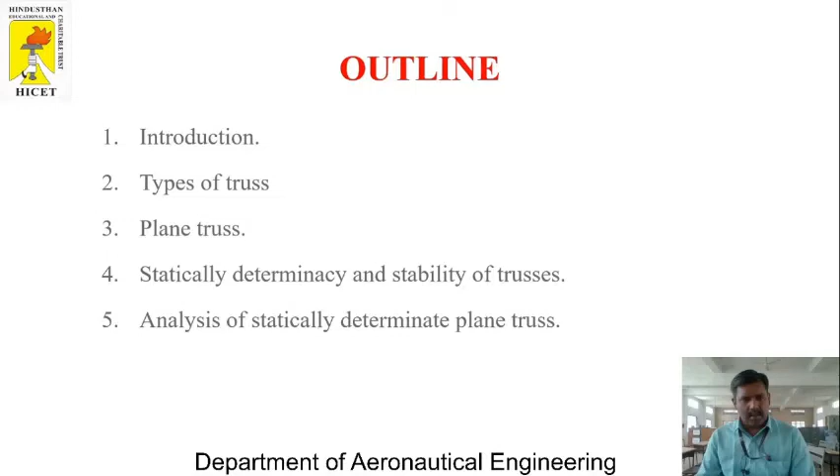In this video, we are going to discuss statically determinate structures. Outline of this video: Introduction, types of truss, plane truss, statically determinacy and stability of trusses, analysis of statically determinate plane truss, and sign convention used.

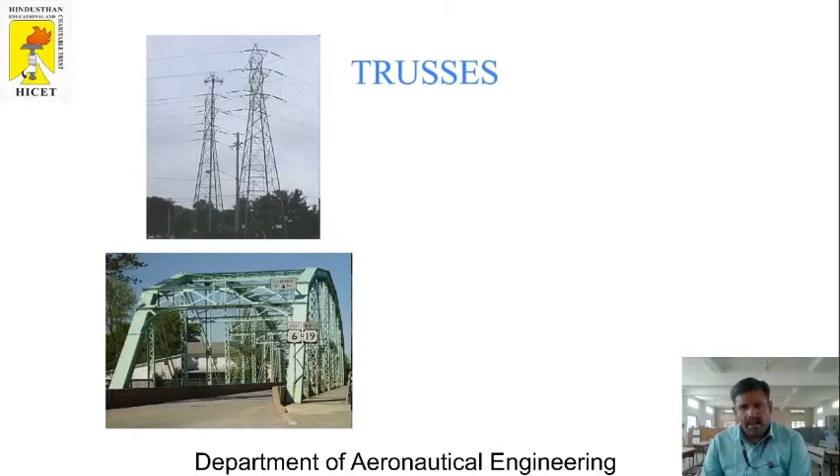Trusses. A truss is a combination of members joined together to form a structure. Here we have some practical examples of different types of trusses: electrical towers and bridges, mobile towers and a stadium, and here we have some other examples of trusses.

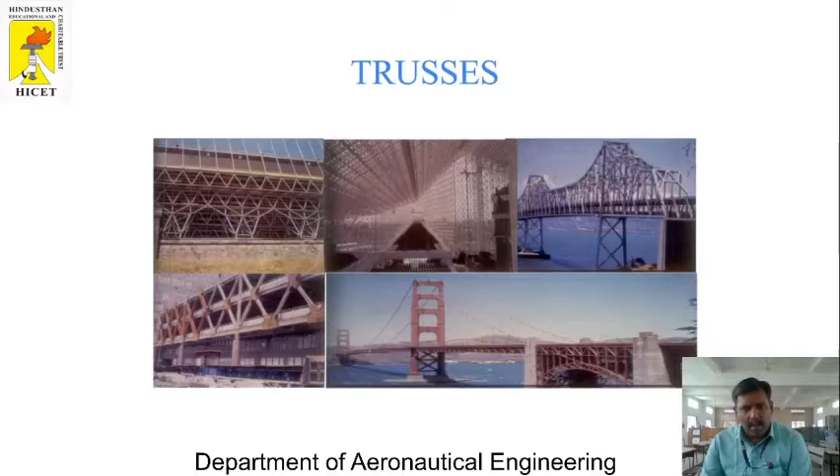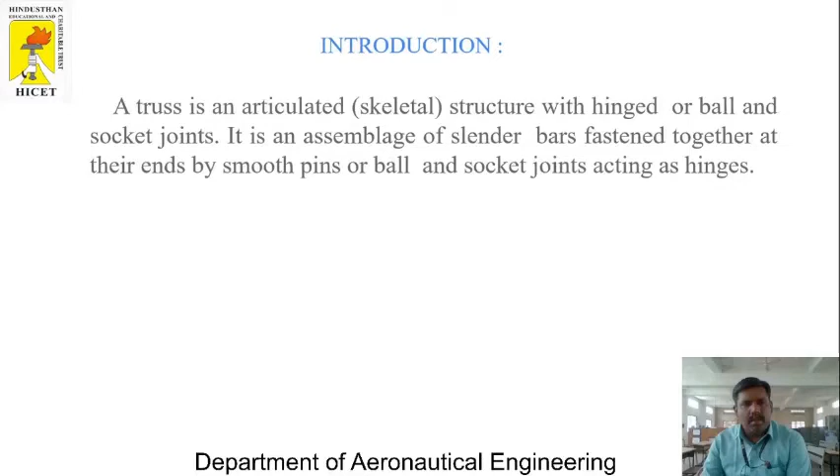Introduction. A truss is an articulated structure with hinged or ball and socket joints. It is an assemblage of slender members fastened together at their ends by smooth pins or ball and socket joints acting as hinges. In a truss, the joints are of pin type where ends of the members can rotate freely.

Individual truss members should not be directly loaded transversely. Loads should be applied at the joints of members so that no bending or shear force will be generated on truss members. Self weight of the members should be lumped at both ends for the same reason.

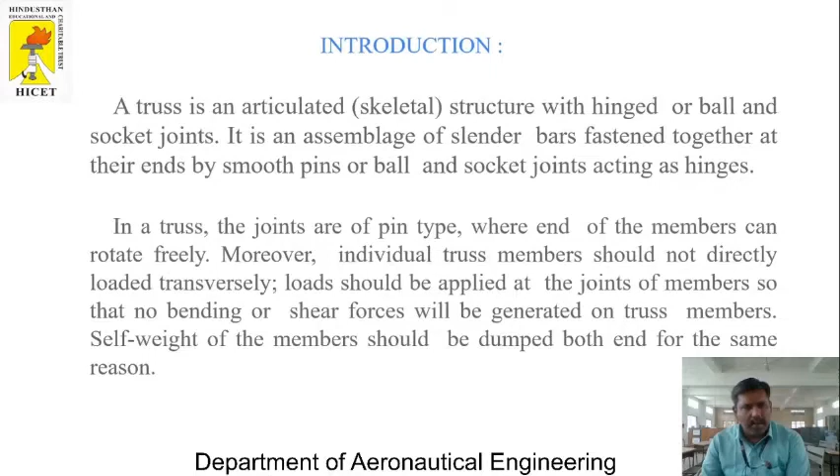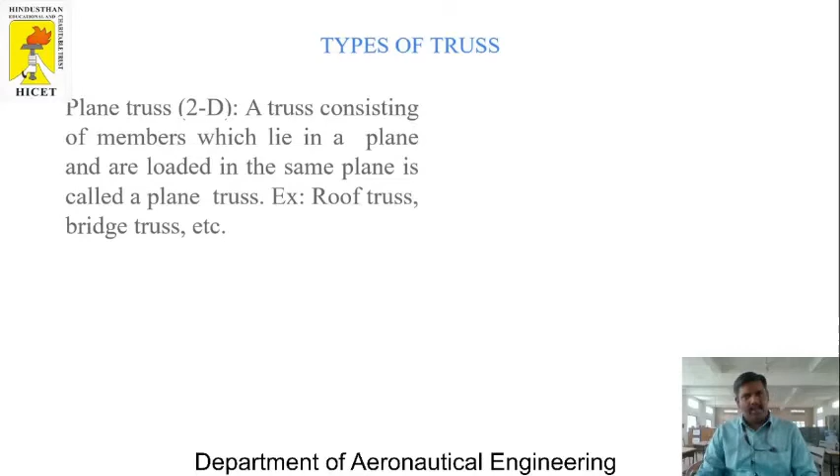Types of truss. There are two types of truss. The first is plane truss, or 2D truss. A truss consisting of members which lie in a plane and are loaded in the same plane is called a plane truss. Example: roof truss, bridge truss, etc. Here we show an example of a plane truss.

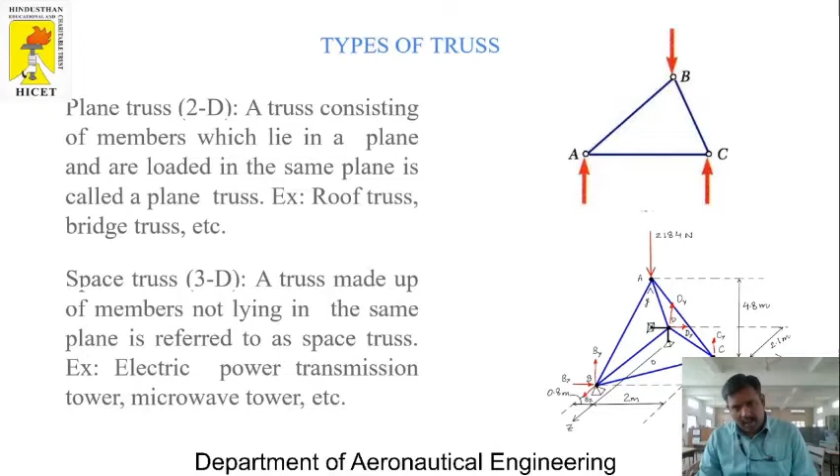The second is space truss, or 3D truss. A truss made up of members not lying in the same plane is referred to as a space truss. Example: electric power transmission tower, microwave tower, etc. Here we show the example of a 3D truss, which may be three-dimensional in the x, y, z direction.

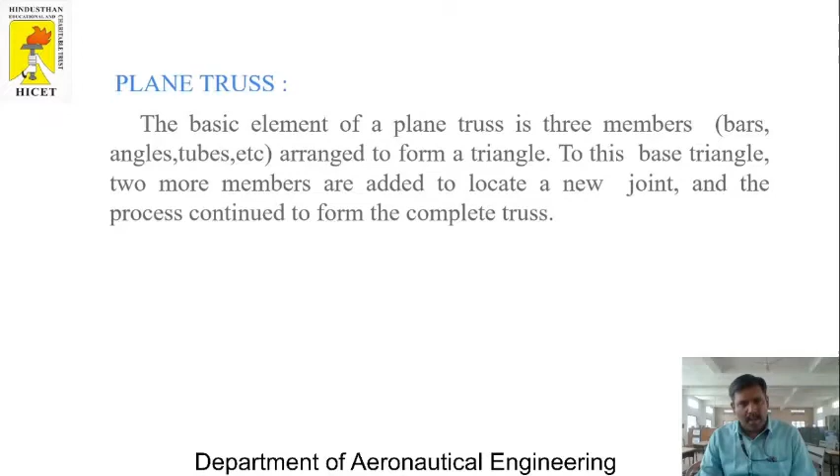Now we'll see the plane truss. The basic element of a plane truss is three members: bars, angles, tubes, etc. arranged to form a triangle. To this base triangle, two more members are added to locate a new joint, and the process continues to form the complete truss. Here we show the triangular truss, which is the basic form of the plane truss.

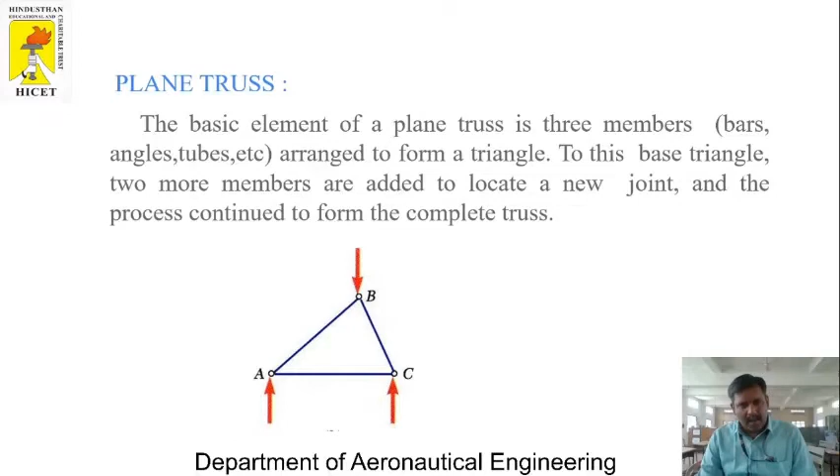The types of plane truss. These are the various types of plane truss used as roof trusses.

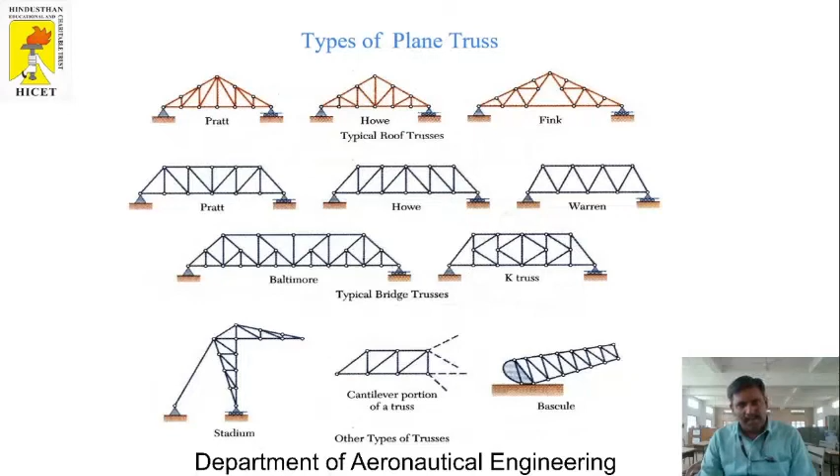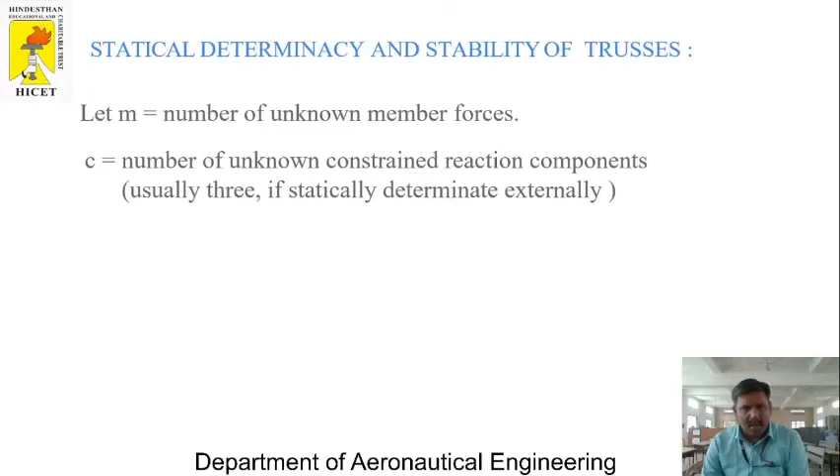Statical determinacy and stability of trusses. Before analyzing any truss, we want to check its stability. Let M equal the number of unknown member forces, and C the number of unknown constrained reaction components, usually 3 if statically determinate externally, and J the number of joints.

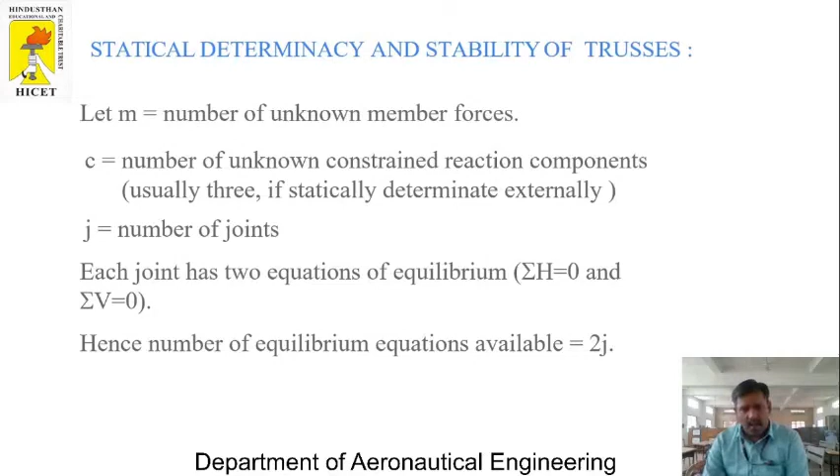Each joint has two equations of equilibrium: summation of H equals 0, and summation of V equals 0. Hence the number of equilibrium equations available equals 2J. The total number of unknowns equals M plus C.

To check the stability of the truss: if the total number of unknowns equals the total number of equations available, then the truss is statically determinate, that is, M plus C equals 2J.

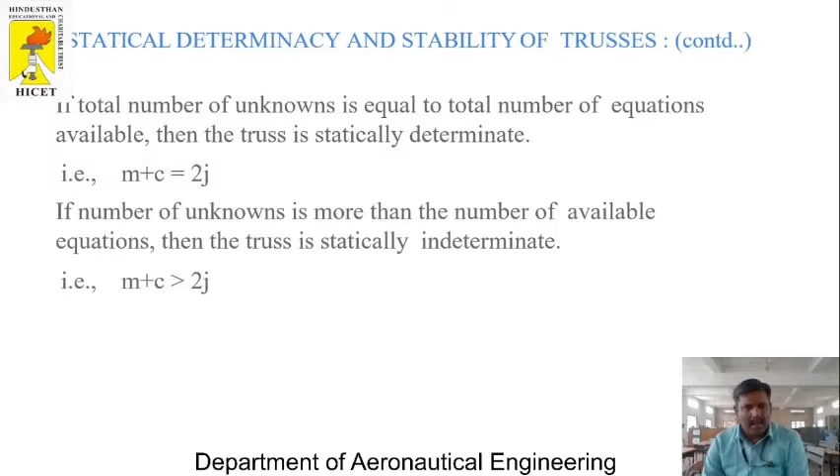If the number of unknowns is more than the number of available equations, the truss is statically indeterminate, that is, M plus C greater than 2J. If the number of unknowns is less than the number of available equations, the truss is unstable, that is, M plus C less than 2J.

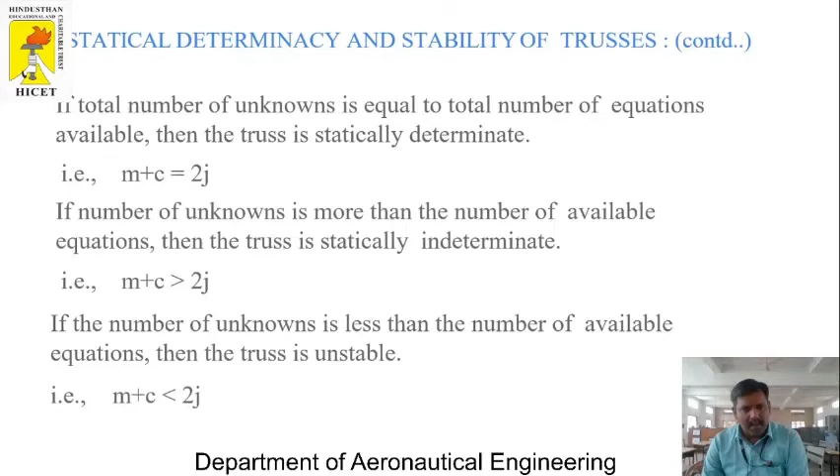To check the degree of indeterminacy, denoted I, we have I equals M plus C minus 2J. The degree of external indeterminacy, I suffix e, equals C minus 3. The degree of internal indeterminacy, I suffix i, equals I minus I suffix e, that is, M plus 3 minus 2J.

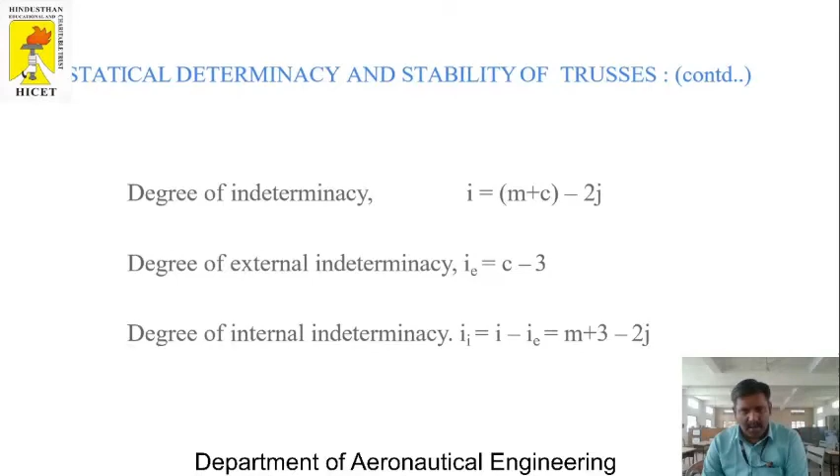When we consider internal indeterminacy, we have the following cases. First case: when I suffix i equals 0, M equals 2J minus 3, and the structure is statically determinate internally and is stable. Such a truss is called a perfect truss.

When I suffix i is less than 0, the number of members provided is less than required for stability; such a truss is called unstable or deficient. When I suffix i is greater than 0, the number of members is more than required; such a truss is called statically indeterminate, also called redundant.

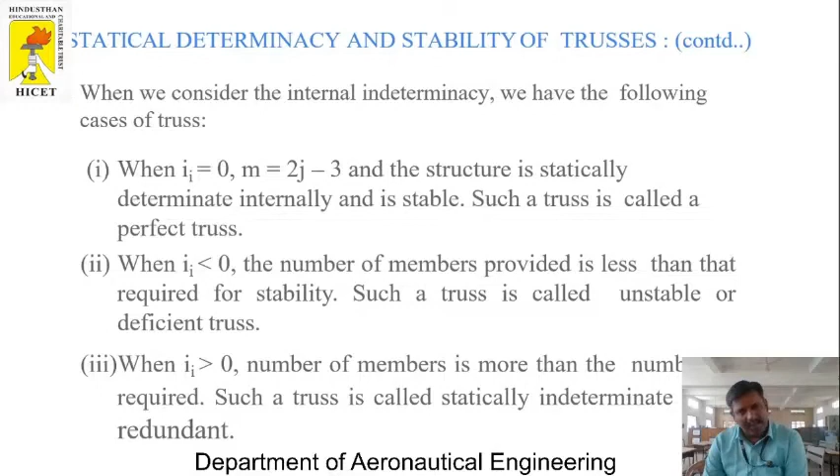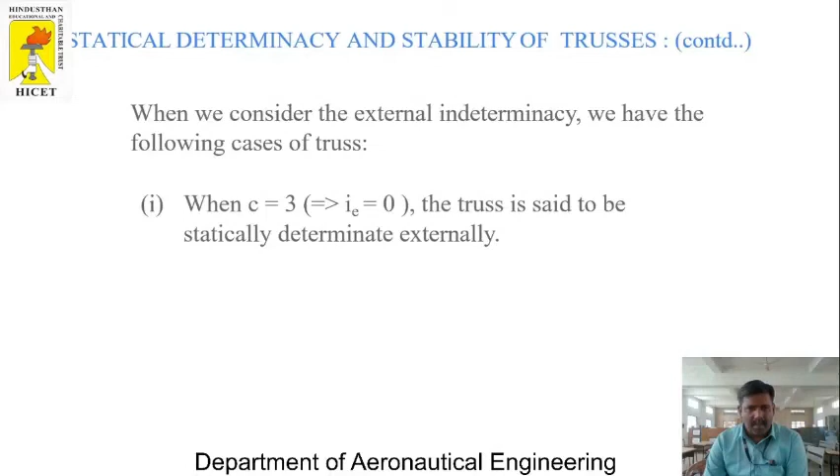When we consider external indeterminacy, we have the following cases. First: when C equals 3, that is I suffix e equals 0, the truss is statically determinate externally. Second: when C is less than 3, that is I suffix e less than 0, the truss is unstable externally. Third: when C is greater than 3, that is I suffix e greater than 0, the truss is statically indeterminate externally.

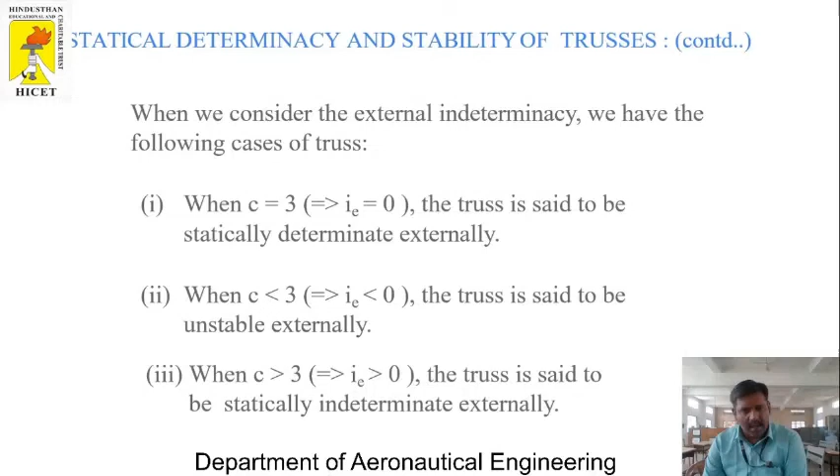The assumptions made in the analysis are as follows. When analyzing the truss, we consider some assumptions: first, the members of the truss are connected at the ends by frictionless hinges; second, the axes of all members lie in a single plane called the middle plane of the truss; third, all external forces acting on the truss are applied at the joints only; and fourth, all loads are applied in the plane of the truss.

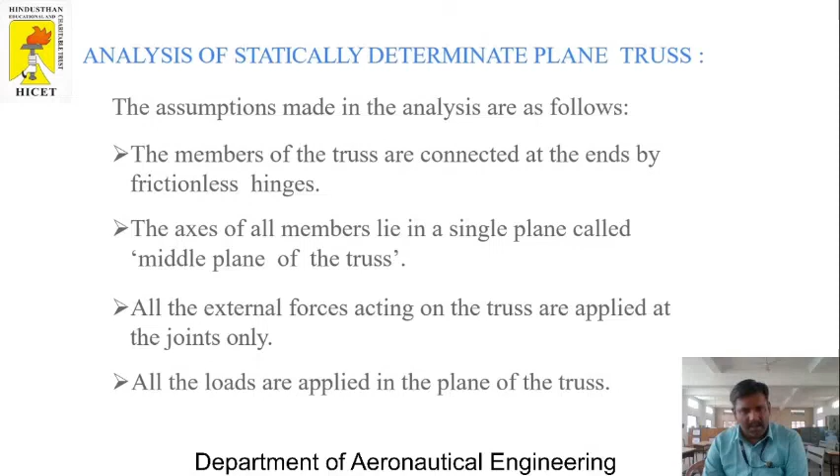The following methods of analysis will be adopted to analyze plane trusses: the first is the method of joints, and the second is the method of sections.

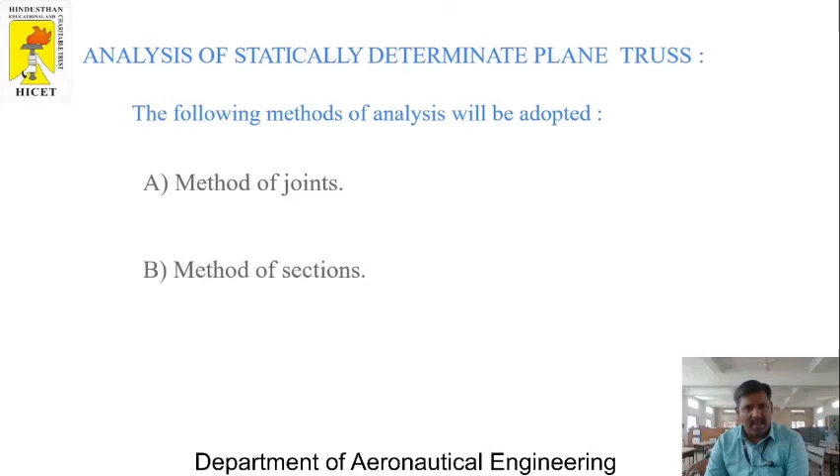The sign convention used in the analysis of trusses: positive sign is used for tension, negative sign is used for compression. When a tensile load is acting on a member, it is considered positive. When a compressive load is acting on a member, it is considered negative.